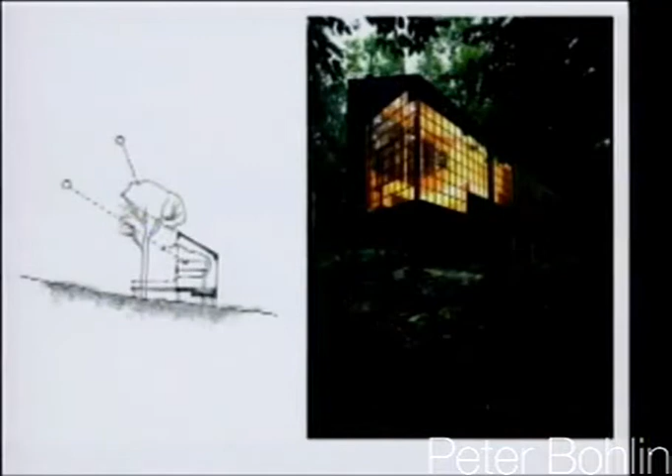Next. It's still iconic in a funny way. I mean, it's funny because then you wonder, well, maybe I peaked. Oh, maybe so. You'd wish to do everything with grace, right? I'm not sure it works that way.

But it really also, I think, I don't mean to overstate this, but it was getting at issues like sun and ventilation and all of that as well. And having a very graceful touch on the land. This sort of, the light in here sort of washes out under the building, but the land rises up right through under that building. So it has a graceful touch.

When James Timberlake wrote the thing or presented to the board at the AIA, the final presentation, which we're not allowed to do, he did an extraordinarily good job. He pointed out that if you took away the building, it has a very gentle touch on the land. That's a monster deal, still.

So that was early 70s. Paul Goldberger wrote about that. I don't know if you spotted the fact that in the New Yorker that's out today or yesterday, Goldberger wrote a little thing in there again. Next.

And so, you know, one of my other heroes was Joe Esherick. I didn't know him then. We later became friends before he died. But I thought he did a string of buildings at one point in his career particularly. He was always socially minded, which was a big deal.

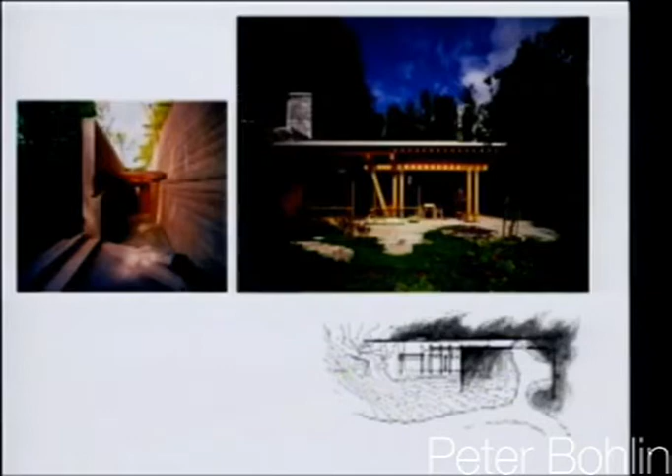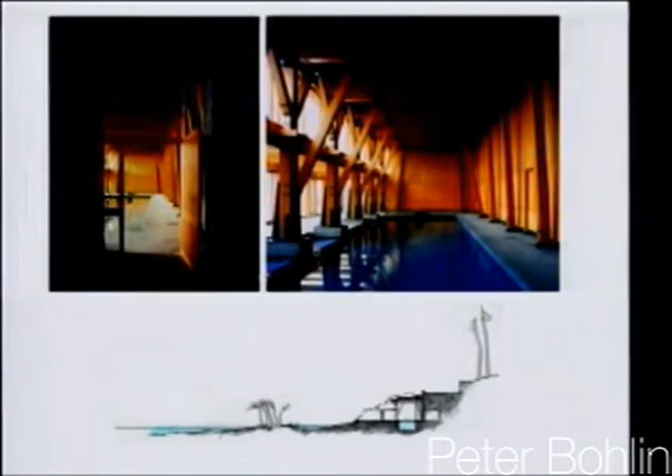Many of these were underground. That building had earth on the roof—it was a green roof. The pool is another one.

But you see, Bill is a terrible driver, and we were worried about Bill coming down the driveway, making the turn, and flying right over the top of the pool roof. So you never go exactly over the pool—you can see the section—but we could imagine this. I mean, he'd do it.

So we made a pile of logs there, loose logs, because in the Northwest you see those piles of logs everywhere—they're floating around. Well, until the owl came along. With the owl issue, I don't think there are many floating now.

So that back corner has more earth and logs. Therefore the columns you see in the corner are shifting in onto those loads. What a pleasure to be able to see that connection and not have to falsify it. It was good, because that space is nicer for those timbers starting to twist in. You're not sure why—you'd probably never figure it out—but it's because the loads got much heavier at that point on the roof.

And you do have this space looking out to the lake. And here you're looking back at that space.

Could you go back on that one, Tom? I just want to point out Lewerentz. Do you spot Lewerentz here? You notice that the door and the mullions do not hit—if the mullions, those wood mullions, hit the stone, they would denigrate the stone. It's not a nice thing to do.

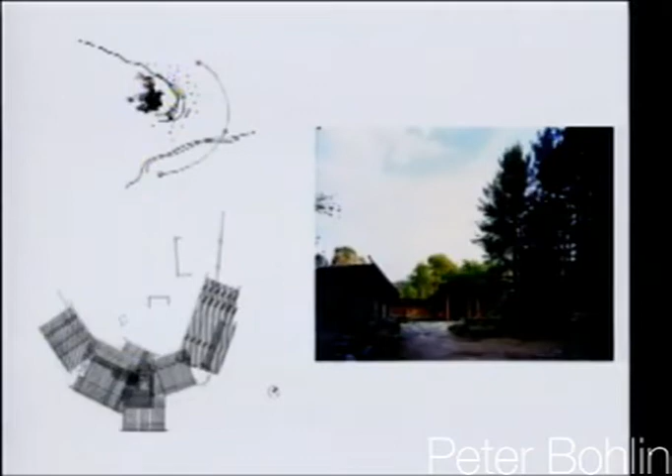The framing—you notice how the rhythms dance a bit. There are splices, there are double members where we were picking up horizontal stresses back to particular columns and that. So in a way it's like a score—like a music score, I think, but of course I'm not musical, so I can say that.

It tells you about itself. Now, you may not be interested in that, but the patterns are much more—as a visitor, you guys would be interested, but many people would not, most would not, or would not notice. But the richness is there because there's a connection between how it shifts and dances and what it does and what it is. Again, it's that interest that I pointed out before.

Next. Yep, there you can see a little bit of it. You see there's a double member all of a sudden? Well, that's because of that column up on the right that's leaning in and picking up some sideways structural forces. So that's a worthy thing, right? And yet those things gave this building much more richness than if we had figured out how to bury some steel and do this and do that and make it all disappear.

And yet you come through that door and that is the view. So you find you're in the treetops and you're hearing a stream at the bottom. I don't know in that plan sketch if you spotted the stream and the sun on that side. So you're looking at a very bright forest. You're hearing the stream. You had not been aware of those till you got to that door and entered the vestibule and reached the stair leading down to this space.

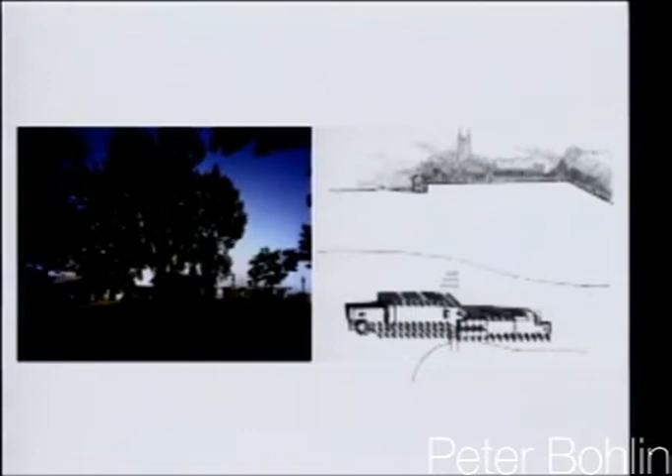And then we structured it. And you can just imagine what was in my mind about older buildings and some 1 or 2 modernists—we won't name who this time—to begin to structure that carefully. And you notice the detailing. Weren't worried about using these sort of looking at the Gothic detailing and then shifting to modernism, but beginning to fiddle with the edges of those stone piers.

I want to leap now to Seattle and the City Hall. It's a place for people, and it's a very steep site. The sun shifts from east to west as it goes down over the Sound and the Olympic Mountains in the distance, and therefore the space is animated by its light.

We had an extraordinary landscape architect that we made sure got hired by the city, Kathryn Gustafson. She said we had 65 feet of grade just on that part of the site, and you don't want stairs steeper than Versailles. Well, guess what? The stairs run into the building. They have to go inside, running halfway through City Hall to make it work. That was an extraordinary opportunity. As soon as she said that, I thought about it for two minutes and said, okay, that's great.

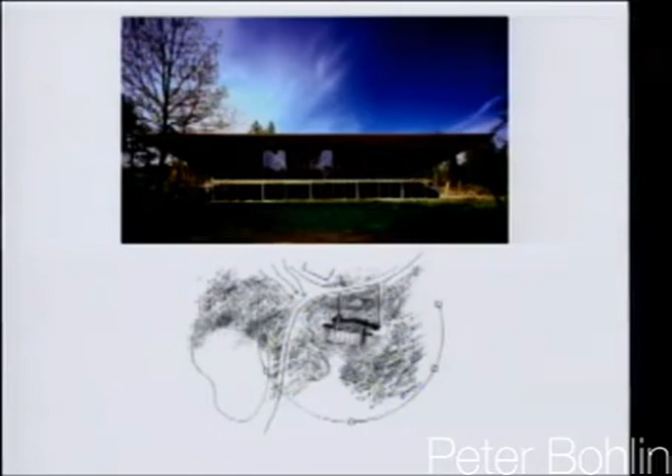Then you enter this great pavilion that faces the sun, that shields from the winter winds, catches the other breezes, and is designed to cut out the summer sun and bring the winter sun all the way back through the space and heat up that floor.

The children operate it, much like Shelly Ridge and what Frank and I did there. That's a ventilating shed, and it's a great pleasure. It's done for an extraordinarily tight budget and very satisfying, and of course, a low fee.

I thought, while we're chatting mostly about things I've been particularly involved with, it's really worth seeing Laurie Olin and Bernie's master plan for the Bell. You know how the Bell building is again getting from here to there, to the point where it twists and looks right where the Bell came from.

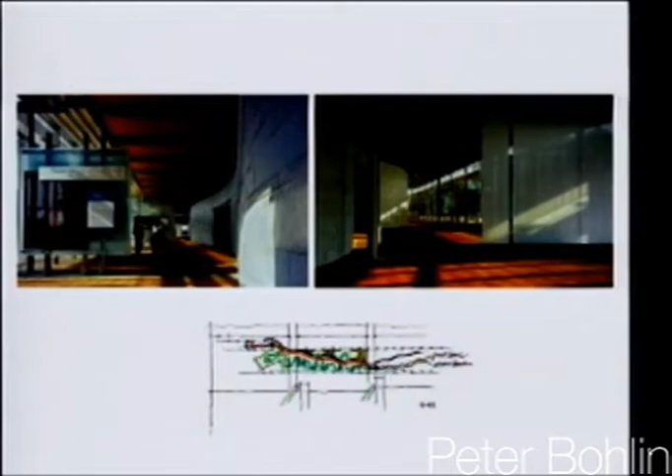This is one of my favorite sketches of Bernie's diagrams, of people who can choose to move quickly or they can meander, and this is where they end up. So it's again that business of thinking about people and how they move and how they react.

Now, am I loud enough now? I may have started to taper down a little.

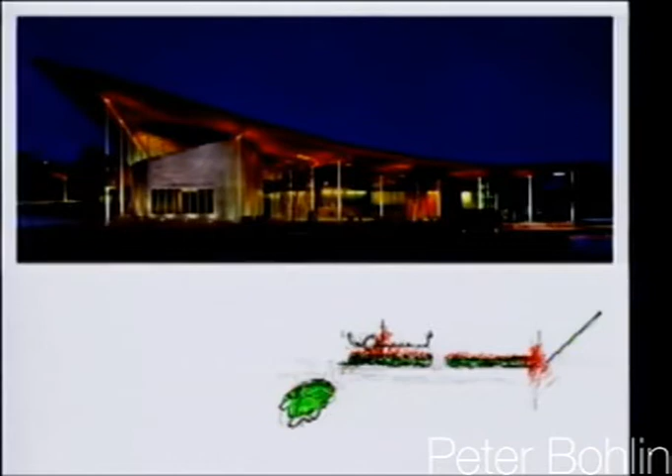And we're doing the Ballard in Seattle. Here we're making a great, wonderful porch for the community. It's a very community-minded place, but in the winter it gets a little wet and damp there, so it's great to have that shelter. It's only a block from the center of the town of Ballard, which is part of Seattle. It's the busiest branch library in Seattle.

It has maritime roots and Scandinavian roots - they were Swedes and Norwegians originally in that part of town, and they were sailors. Of course now we have much broader maritime activity, but you can see how we were thinking about that when we made these little bars in the building that look a bit like containers. And you can see how we put that building together under a green roof. At the time it may have been the largest green roof in the Northwest - not anymore, but it was then.

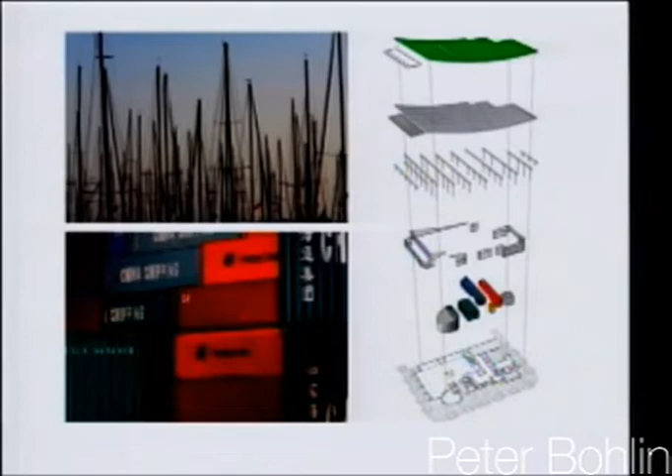The multi-purpose room is just where it should be. If you get it positioned right, you can get in from the outside and use it at night. And if you do the baths right, the baths can still be in use and keep the rest of the library shut down. So that's how you make it really work. And it's a daylighting issue.

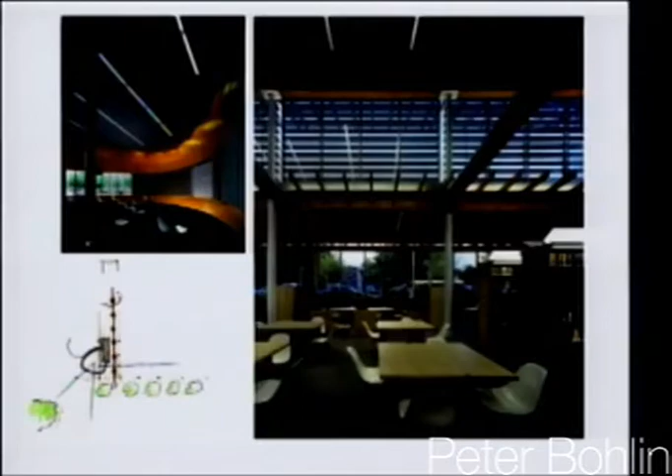In the Northwest, even when it's cloudy, it's misty cloudy mostly, and it's still fairly bright, and it can be glary. So if you have large glass areas, you want to begin to mute the brightness, which we've done here, because that's looking to the north.

Our partner, Robert Miller, designed these tables - not the Eames chairs, but the tables - and they're made without connections, out of pieces of plywood, just pushed together with a rubber mallet. So Scandinavian library people have come over to look at them, which is very nice from our point of view.

And the roof - Robert also did this terrific periscope. See these slots between the wood that go all the way around that element. No sign, but the kids find this, and they look through, and they're looking out across the roof. Because there are no books about this that we know of, Robert laid it out on the floor of the office, and we lay down on the floor and looked through it until it was just right.

Almost didn't put this in, and then decided to do it quickly. This business of doing modest housing is a very large interest, I'm sure, on most of our parts. Here in Seattle, we've done 3 units that are up to within an inch of where they could be on setbacks and on height, including saddlebags for windows.

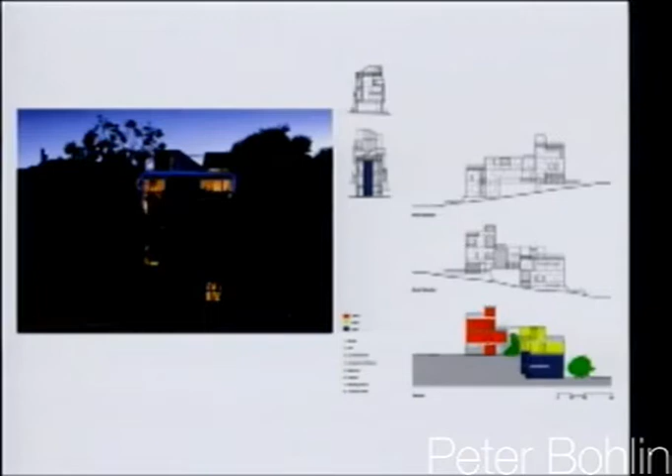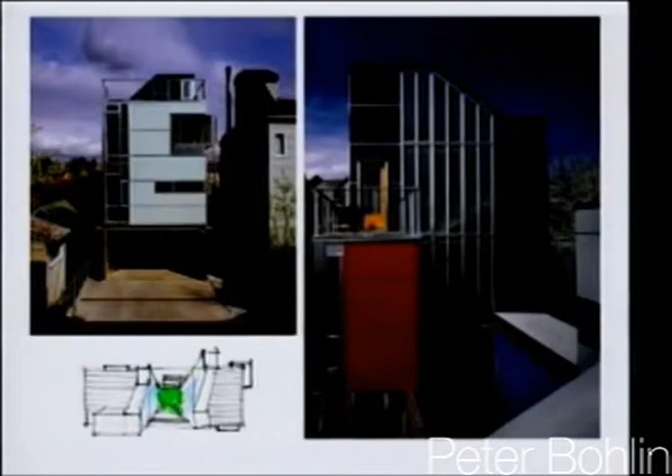You see that little bay up at the top there to the right? That's a bay window, therefore it can be bumped out. And there's a little court in the middle, and we've got either 3 units or 2 units, depending on if you open a door or close the door.

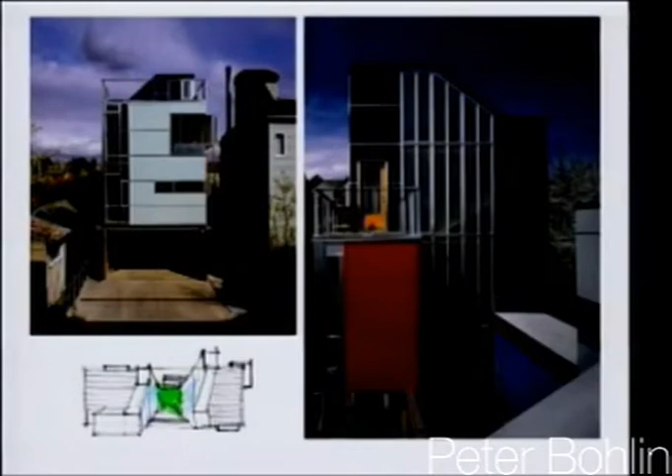And I would love to do more of this. Now, it's hard to make the numbers work again, but if we can do enough things that are making money, we certainly intend to do more sort of thoughtful, thoughtful infill housing of this sort. At this point, we're not seeing this so much in the east, but certainly in the northwest, we're seeing this opportunity.

Furniture, simple, again, we design. But you notice the window mullions are extremely simple. All we've done is clipped the metal system to the outside of the studs. And so you read the body of the building, and where you have a window wall, it's extremely simple and economical.

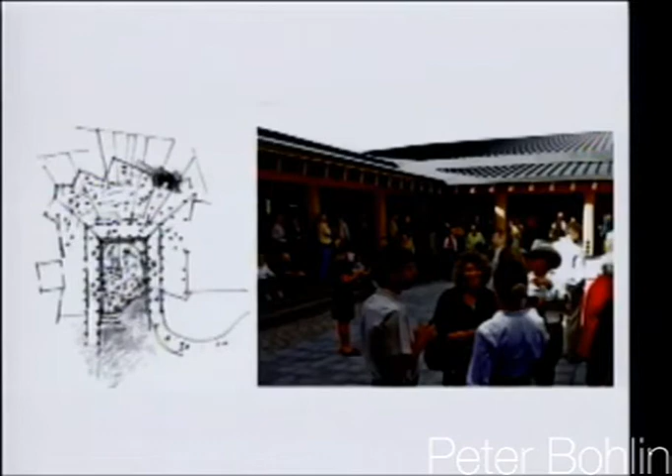And these are great timber. All these timbers are Canadian, but they're all, I forget the particular word, sustainably grown and forested.

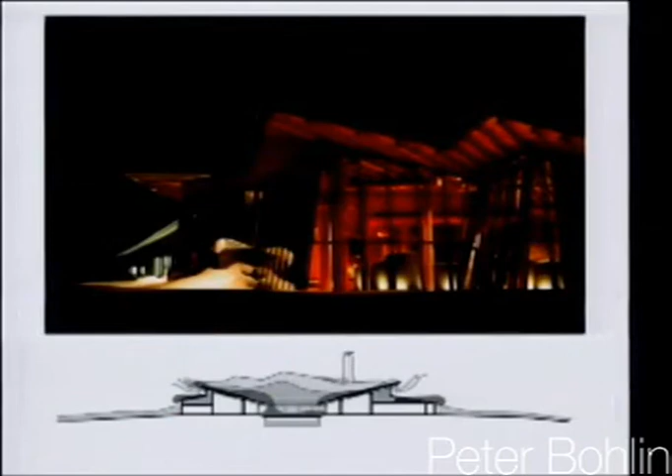The windows tilt slightly to cut out reflections and also to aim a little more directly right at the mountains. You see how we looked at the snow here in the court. We looked at that with a very good acquaintance of Bernie's and mine from San Francisco, who's sort of an alpine expert. I think he does mostly forensic stuff now—architects get sued, this sort of thing.

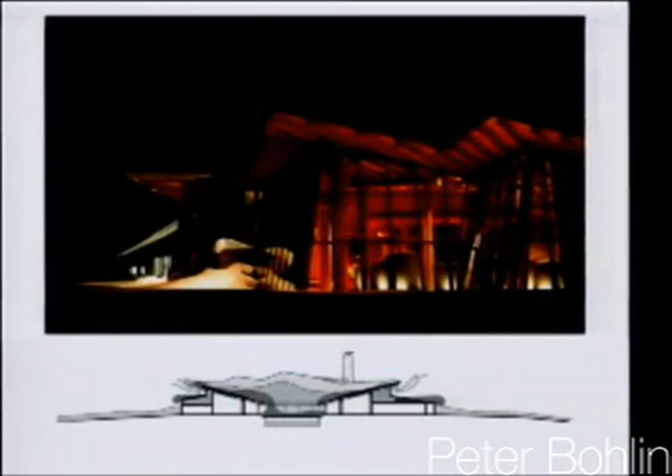We found that if you looked hard at the snow patterns and the wind patterns, the code was wrong. You still have to meet the code, because a code is a code, but it would not have been sufficient for those very large loads of snow that would develop on the roof because of the winds and so on. So we designed for the code, but then with an overlay of his calculations. You see how that makes these tunnels around the court in the winter, and the snow sits in that recessed court and it melts. We put snow melt under there, but it's geothermal.

So this is modernism, and it's rustic, sort of, right? But it has to do with getting from here to there and dealing with people's emotions. I believe most modernism has not done that as effectively as it might. That is my own personal view.

Our clients are here for this one, a Philadelphia client, but this house is on the Juan de Fuca Strait. That view—you see the sea down here—is that 150 feet high? Yeah, and it's a cliff, so you don't want to get too close because it may slough off. You reminded me I was too close at one point. I don't remember that. But it's a simple building, not a big building, and it's lovely—I'm tickled about it.

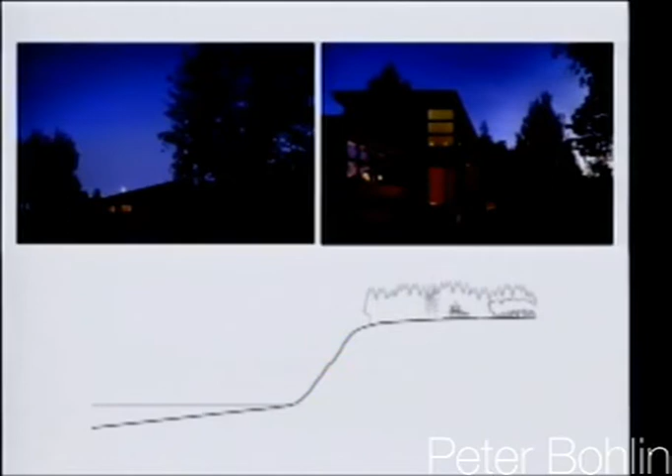You see we're using recycled barn material, and it's an agrarian kind of scheme. It's got a cistern right where the V is in the roof. You can see the sequence moving this way and all of a sudden getting that view out to sea. That's looking right out toward China. Well, actually, I think it looks a little toward Vancouver Island, but it's so far away, you can imagine it's China.

So we keep doing those little things. It's hard to make the numbers work for us, but we want so badly to do them. And we're not stopping, but the problem is, of course, to do good ones. Whatever that means. So here's a larger one, and we're down to the last few projects. I bet my time isn't too terrible, actually. It's probably pretty good, close to what I said, because we started on time, but I didn't get to start at the beginning.

Bernie's always kidding me about taking much too long. No, not quite like that, right, Bernie?

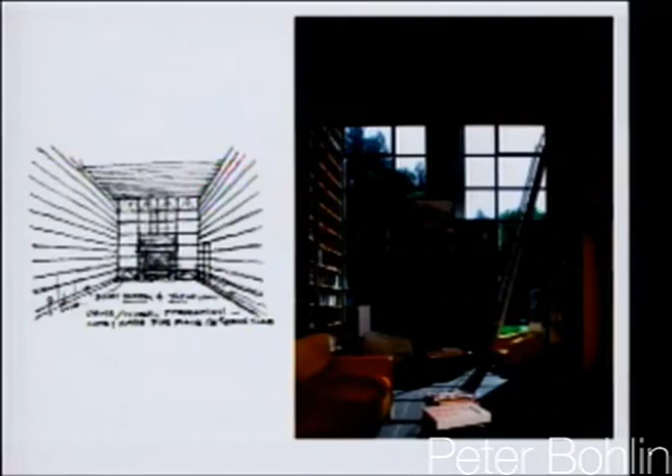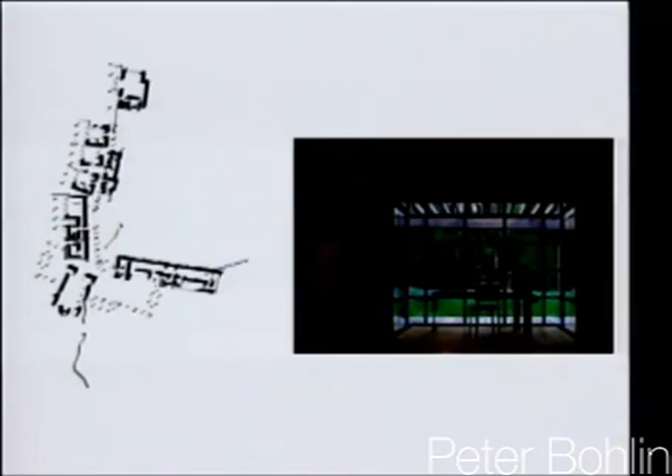Next. And there's that space, the lower left. I have a gizmo here, don't I? Right there. But isn't that a nice plan? Cut into, I kind of like it. But it dematerializes the building to a great extent. And so it's modernism, but isn't quite the normal way of doing it. And yet, I think it has to do with how people perceive things, right? And how they move through them, how they discover them, how they remember other places where they've been, how they're comforted, all of that.

And that's a Chareau desk from the 20s. Just great. And that is an astronaut's underwear. Only one we know out of captivity. No, it has all the little tubes, for heating and cooling. You can't quite see it in that photo, but man, it's wonderful. Next.

hardware, we designed that. And it's biomorphic. Grip it. And there are all those sorts. So you notice these props for the great oaks. So what a pleasure to have this to do.

This house is in that book, but there will be a book on this house because the client says, well, we're going to do a book. So the question is how to do the book. And I think we'll keep our hand on it, but not. Get a great designer, Matilda from Malmo, who did the Helvetica book for Lars Müller. And I think it's going to be great. And then we'll spring the photographer and she on this and see what comes out. Yeah.

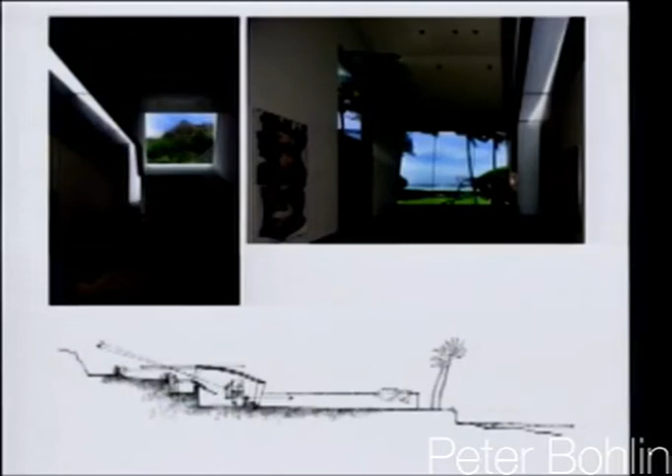So it all has to do, again, with point of view: how you get to that point, how you're in the potent position, and then how you deal with it. This is how we dealt with that view.

So this is now coming closer to home, and I think it's the last project. This is Combs Point on Seneca Lake for a wonderful client. It's in the newest Metropolis, I don't know that it's out yet, I think it's out but I'm not sure it's arrived in the mail. But I don't think it has a photo of that waterfall, at the head of the ravine. The house is in the ravine and extends out on the delta. That ravine, when it was made, would form a delta in the lake.

So here you can see in this little sketch how the house's potent position, as far as the main living space goes, is just beyond that edge, where you can also see sideways along the edge of the lake. This lake is very deep, I think it's like 1,000 feet, a very deep lake. It's a big glacial trough. But there's the waterfall.

And it's a little bit of a higgly-piggly necklace that sort of parallels the stream but doesn't, and gets between the trees. And then we will someday, we now have the path to here, someday we'll take it to here. You know that little photo of E.B. White in his tiny little studio, his little room? Is it E.B. White? I think it was. We think we'll do this tiny little room up there. I don't know what the architecture should be, but right there, and it connects by a path to here.

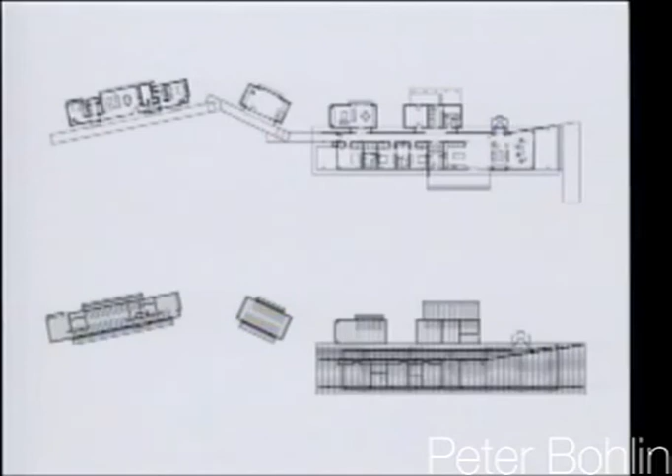You can see that roof tilting up there and there.

Here's that steel beam that's coming down that hall, and see how it twists right here.

And of course, another fireplace. My mother, when we did the first house for them, we made a box to scale up the fireplace. We made a room, and my mom called it the hot box. But we've been doing hot boxes of one sort or another all through our careers, because it gives you a chance to scale up a fireplace, unless you really only have room for a little tiny thing.

But to make places that are counterpoint to a space like this is just terrific. And you know where those shapes came from? I think they came from my love of Lou, but he never did one like that exactly.

But you notice here, you're right to this point at the dining table, the kitchen's right here, and there you're looking sideways down the lake, which to me is almost a better view than straight out.

And there you can see a study of that little view positions.

So in Metropolis, Alexandra Lange, I think she calls this a sort of porch-like — the whole living room is kind of like a porched place.